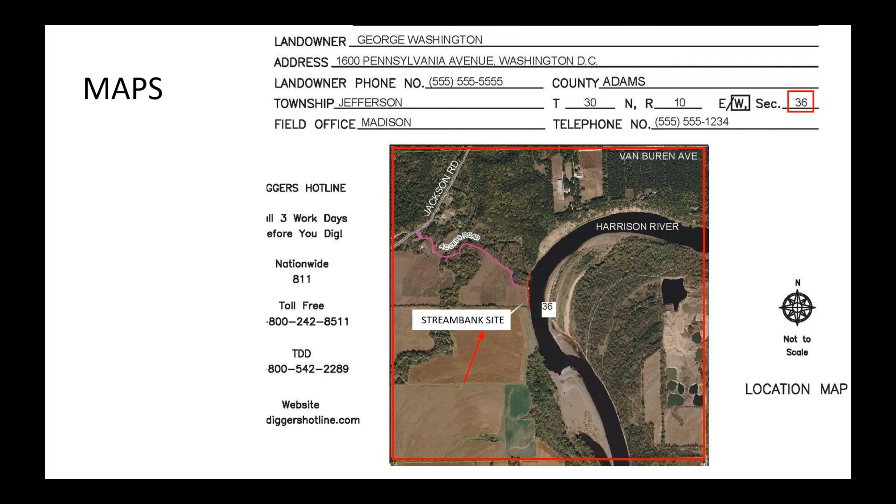The purpose of the location map is to describe where the site is located to someone who has never been there. Traditionally, the location map shows the entire section and then points out where the site is located in that section. If you want to zoom into a quarter section, which quarter section should be noted in the township, range, and section area. I'm going to try turning on our little pointer here. So up here, you could say that you're in the northwest quarter section or something like that.

Maps should be drawn with the north arrow toward the top of the sheet, but if this is not feasible, the map should be drawn with north toward the left. A north arrow must be shown on all maps. Show an egress route when the site's not close to a road, especially if it's not obvious how to get to the site. Label the roads. Ideally there is more than one road, but items like rivers, we have a river here, and railroads can also help in location too.

A quick checklist, if you're the checker of a plan for the location map, is: can the farm be located from the plans, and is the project site clearly shown?

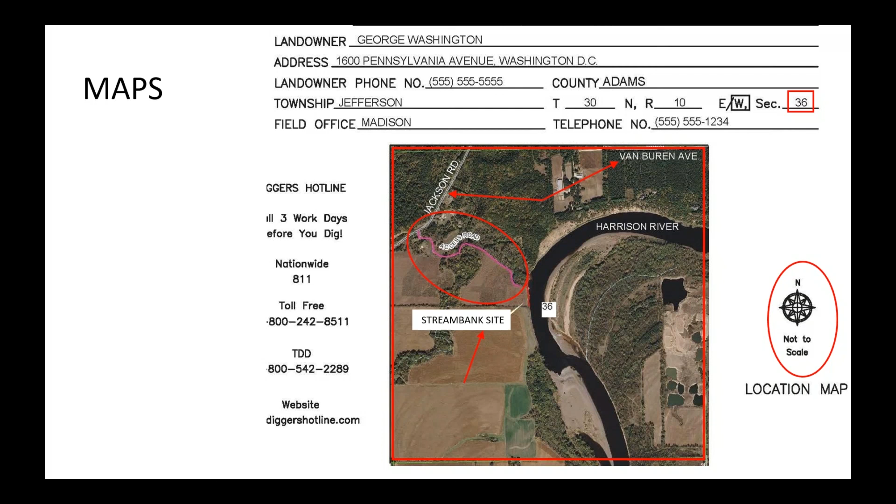Now, another thing we might have thought of as a map, but they're calling layout drawings, or sometimes they're called plan views and layout sketches. The north arrow can be in any direction on these. You want to pick a direction that allows the layout to fit on the page. Traditionally, the layout would have the direction of flow going from left to right or from top to bottom.

The north arrow would be important to show how to orient the page in the field. But if having it go left to right or north to south would make it confusing, you can have the north arrow going up, as is shown in this example. A quick checklist for a plan view includes having benchmark information, some layout dimensions, a scale, and of course your north arrow.

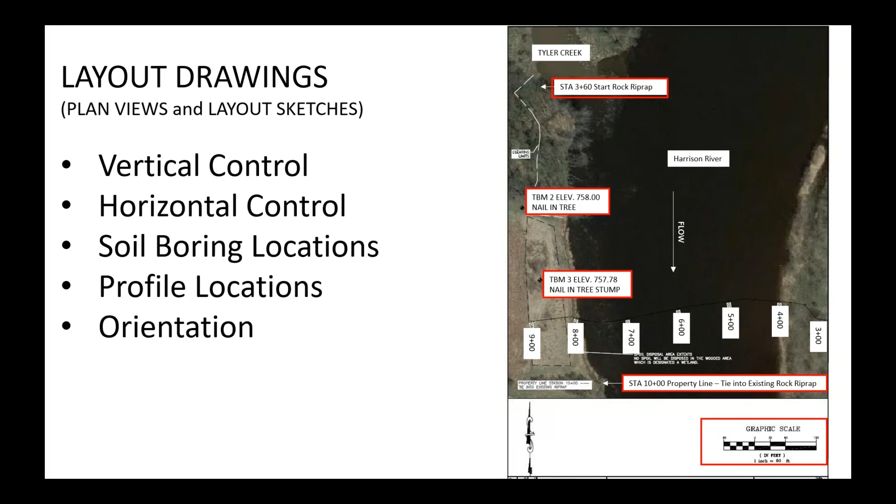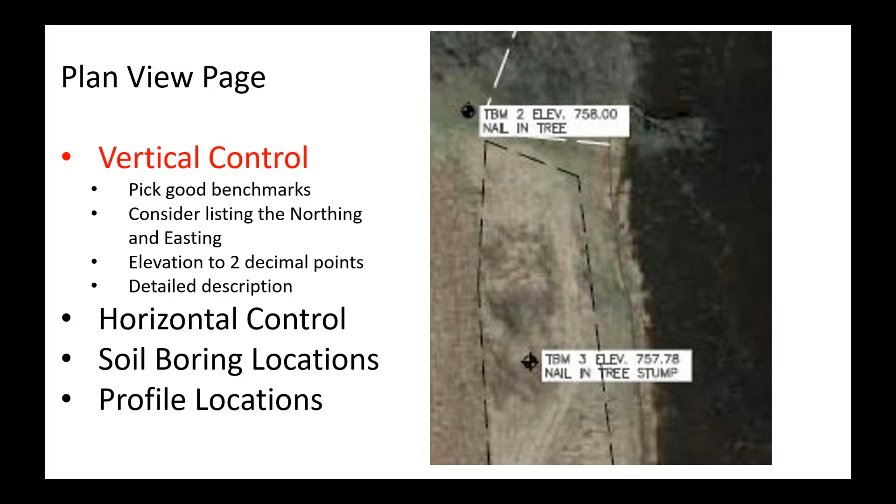Vertical control requires picking good benchmarks that will last through construction. A good description or northing and easting are needed so that the benchmark can be relocated during construction. In this particular case, these TBMs just said nail in a tree, and the construction plan actually got worked on 5 years after it was surveyed, and one tree couldn't be found anymore and the other was now a stump. So consider these things when you're doing your survey.

Horizontal control, this plan view shows some riprap stationing, clearing extents and a spoil disposal area. But is it describing horizontal control? The designer chose the downstream property line as station 10+00 because it's easy to locate that point in the field, and it ties into some existing riprap here. This is an example of some good horizontal control.

However, the spoil disposal limits, this black line here, was not well described. It's really only visual. So the question to ask is, is this acceptable? Would it have been better to give a minimum distance from the top of the stream bank that's shown, and maybe just label the left edge as the field edge? You can kind of see from the aerial photo that we have a change in vegetation, but it's left kind of nebulous there.

The upstream end gives the starting riprap point as station 3+60. This can be measured from the 10+00 station, and it also allows for extension of riprap if you need to take it a little further during construction because of things that have changed on the site. This way we wouldn't have any negative stations. If we had made this 0+00 and gone the other way, and then had to extend in this direction, we'd now have some negative stations.

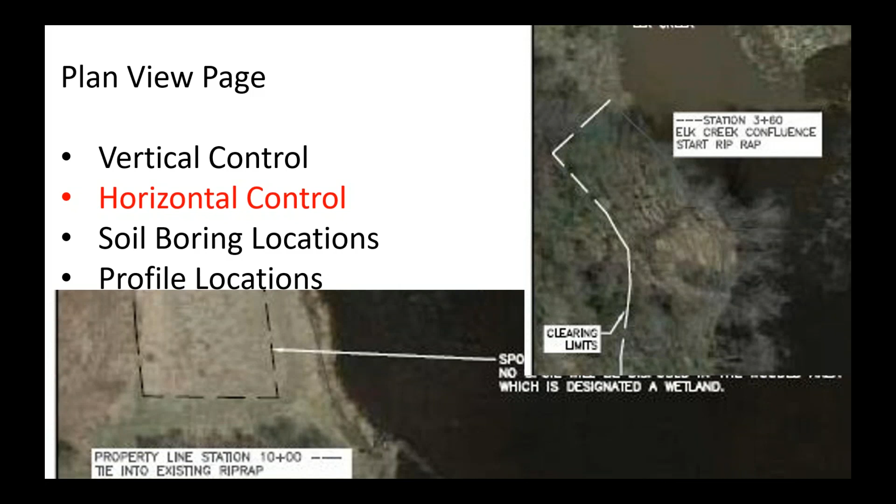A common error in the preparation of construction drawings is the omission of required details, sections and dimensions. Soil boring locations are really only needed in the construction plan if it will be useful to the contractor to construct the practice. But what's important to note is soil logging information is always required in the soil report that's kept with your planning documentation.

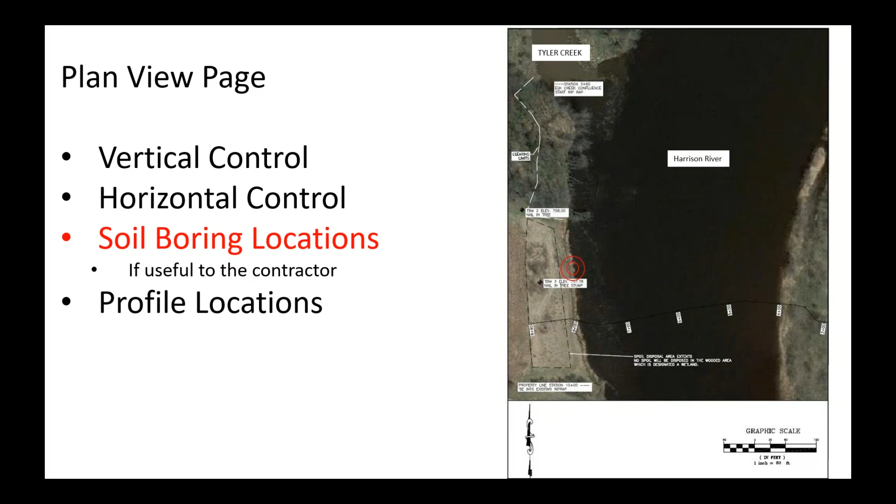When it is included in the drawings, the boring logs should be plotted on the profiles or cross sections at the locations taken. And when the test site does not appear on the profile, the location may be identified on the plan view, and then your log data can be put in another convenient spot on the drawings. The Unified Soil Classification System should be used to describe and log all soil materials, and applicable groundwater levels with the date of observation should be shown on the logs.

So profile locations, profiles and cross sections, they both kind of fall under this topic, and Pete's going to get into profiles a little more. I'm going to discuss a cross section since there's one on this plan view. Cross sections should be plotted as viewed when looking in the direction of increasing stationing of the survey, such as from station 0+00, and you're looking toward the next advancing station like 10+00.

Stationing usually increases in the direction of flow toward the downstream. So you can see the flow direction is this way on the river. And in this situation, we had 3+00 on this side and 9+00 on this side. So if we kind of turn our heads upside down and we're looking downstream, 0 would have been on our left and the higher stationing to our right.

So we often will say left to right looking downstream. But if such orientation makes the drawing unclear, it may be changed as long as the orientation is labeled, such as left to right looking upstream. So perhaps in this situation it may have made sense to have 0 on the left because of how our plan view was showing it. It depends what you're used to doing in your office. Also, sometimes rivers are already stationed from a previous job, and then you should always go with what's already being used.

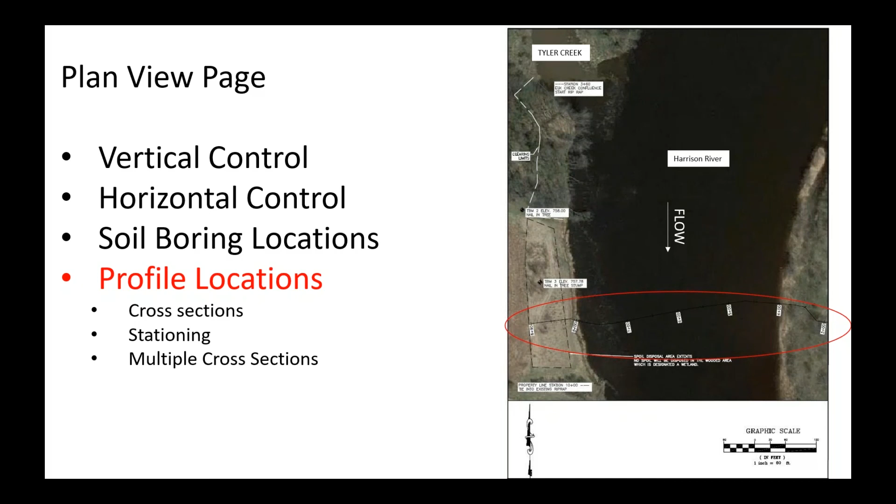In that case, your cross section on your plan view should start at the point that you're using. In this case, the plan view is only showing from 300 to 9+00, so the cross section in the plans should show that same stationing. Multiple cross sections on a sheet should be of similar scale and arranged sequentially according to stationing, and probably the main point is consistency. Orientation of views and directions of stationing must be consistent throughout the drawing set.

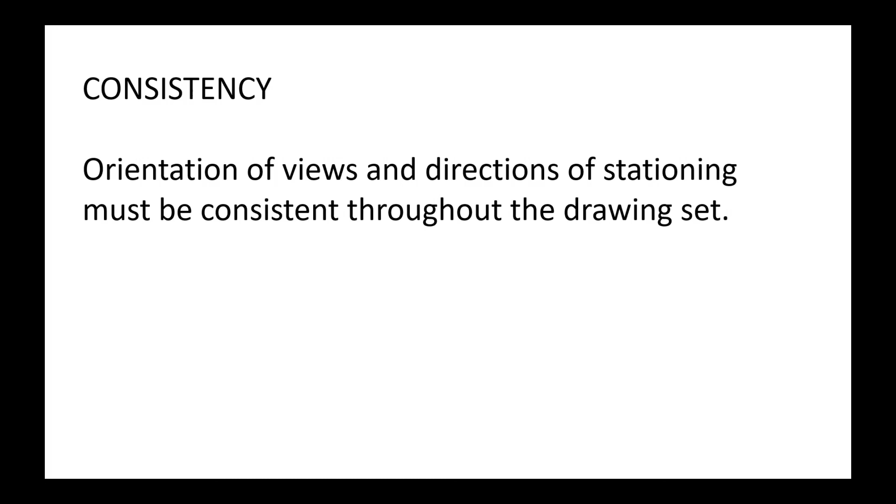All right, what I was going to talk about today was the style and content that we put in our construction plans and details. Starting out a little bit dry because we'll talk about some of the National Engineering Manual policy, but the written policy is where we keep our consistency in the things we do, and that's where a lot of the information we're after is found when you're looking at construction plans.

So starting in the NEM, it says drawings should present as much related information as reasonable on the same sheet for efficiency and clarity. If possible, details should be drawn on the same sheet as the work to which they apply, so you're not chasing through a plan for different details. If details are shown on a separate sheet, appropriate sheet references must be noted. So try to get it on the same sheet if you can, but if you can't, you can note to different sheets. Dimensions and sizes of components should be shown on the drawings rather than referenced in specifications or standards.

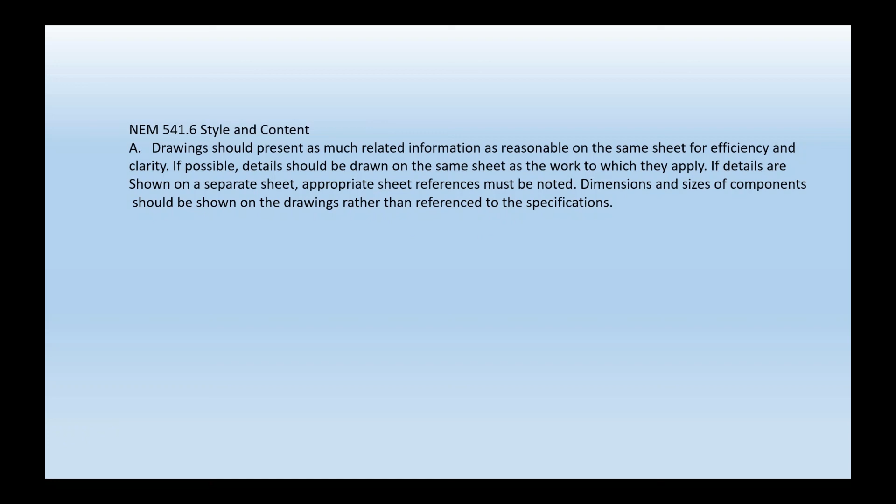Reduce the number of pages where possible. If you've been around a while, you may have seen the 25 or 30 page set of construction plans, and it's hard enough for us to deal with that, but a landowner or contractor would find it even worse. So try to keep page numbers down. But if the page size is limited, you can reference some of the details to other sheets.

Now here's an older drawing example with multiple details on one sheet. This was one of the bigger size sheets, and we tend to get away from those nowadays, because when you get out on a construction site, it might turn into a kite or something since they're so big. But they did have a good use in that you had the multiple details all shown.

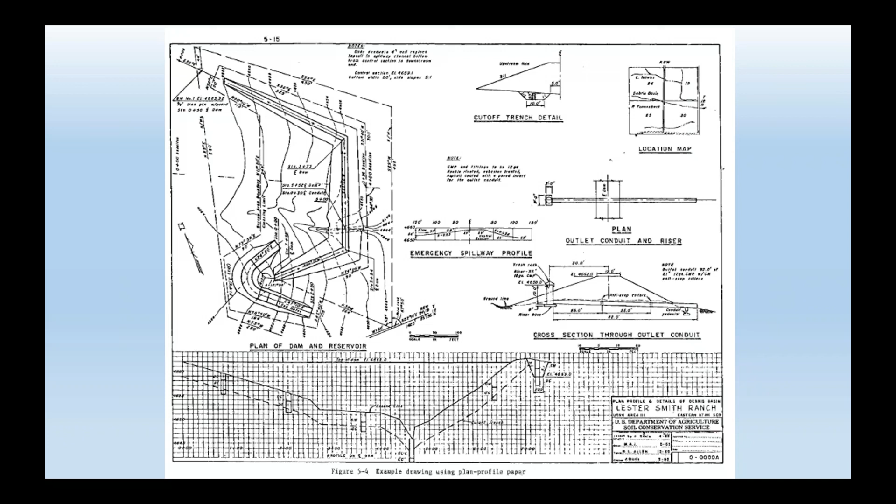Your individual printer capabilities and paper sizes are going to dictate the amount of detail you have on a sheet. Now, most of the time we go with the 11 by 17 nowadays. Here's a more basic view with notes indicating which pages the additional details are on, because you couldn't fit that many details on there. So you can see sheets 5 and 7 referenced for additional details and that type of thing.

So notice that the dimensions are shown on a drawing. What you don't want to do is have a reference, say, to a standard to get the top widths, like 'see the 378 pond standard for the required top width.' You want to have it on your plan so that all the information needed to build a project is pretty much on your plan view page, or at least you'll know where to look for it.

Here you can see the grass waterway standard drawing details are referenced by page number, such as 'see sheet C such and such' for the details. And in this case, a photo is brought in behind the survey data, and that can be a good visual aid, but it's not required. In some cases, it's not really that helpful.

You'll notice up in the upper right here that you have a road name that's a little bit hard to see because of the background information and colors behind it.

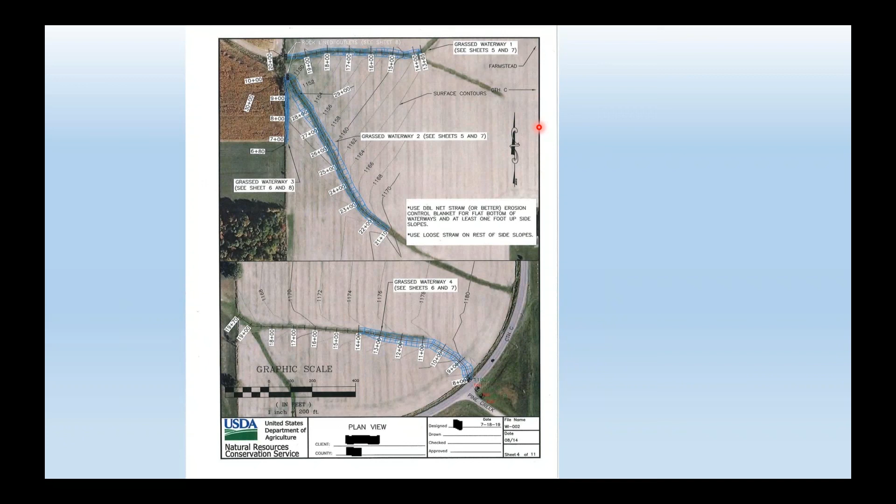So the style and content we've talked about. Content, appearance, and the details themselves are all extremely important to us. We should take pride in our work and strive for complete clarity in what we're showing. For consistency, we follow industry and agency standards so that across the state, things are pretty much the same.

Symbols used in the preparation of maps and engineering plans should be consistent with the national cartographic mapping symbols. So there are national symbols out there. Our construction plans and drawings need to have a professional appearance that we can take pride in.

Mistakes and sloppiness in our details are not often forgotten by contractors and landowners, if they ever forget. If you give them something that's of low quality and they find mistakes, they aren't going to forget that. So we strive for clarity and a professional look, and in some cases it's almost like a work of art, something that's really good looking for them.

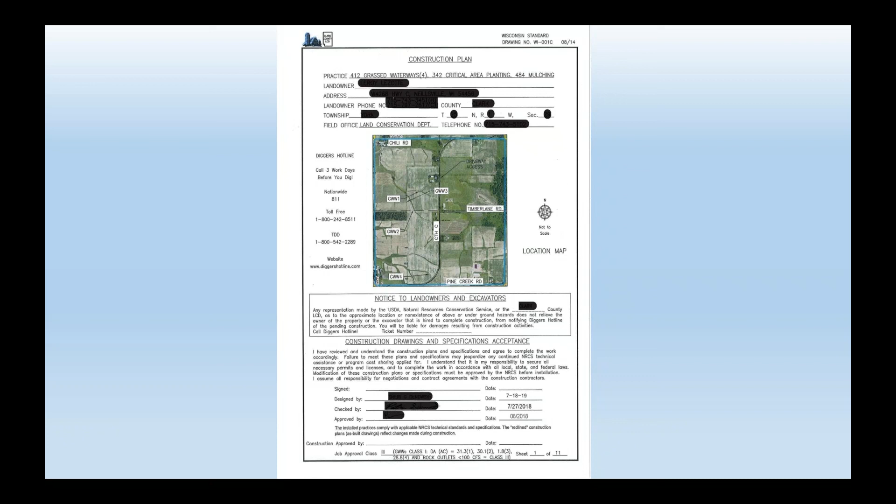So our construction plans are all fairly similar, and that's for a good reason. We're following the industry and agency standards. We all start with a cover sheet describing the geographic location of the project.

We also always include quantities and pertinent Wisconsin construction specifications. It's important to get the page numbers right. That seems to be a recurring problem.

And with today's CAD drawings, layout pages are often scavenged from other plans, which is a good time saver, to take a page from a different plan and bring it into the plan you're working on. But we have to be real careful with that and make sure we keep the exact details we want for the particular project we're working on in our plan.

I've seen cases where the estimate of quantities page came into the plan and there's a wrong pipe size, and all through the rest of the plan you had a 12-inch pipe, but on the plan estimated quantity sheet you had an 8-inch pipe size because it was brought from a different plan, and that was very difficult for the contractor. So we take pride in accuracy in a set of plans that is easy to read.

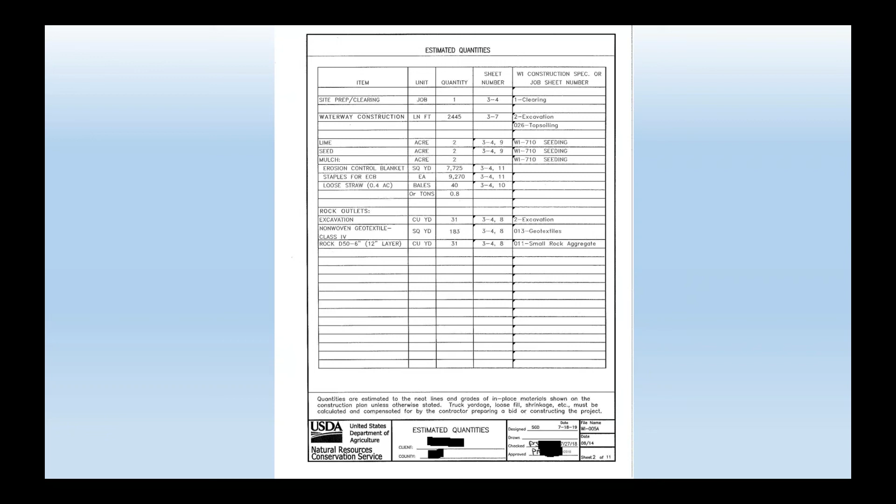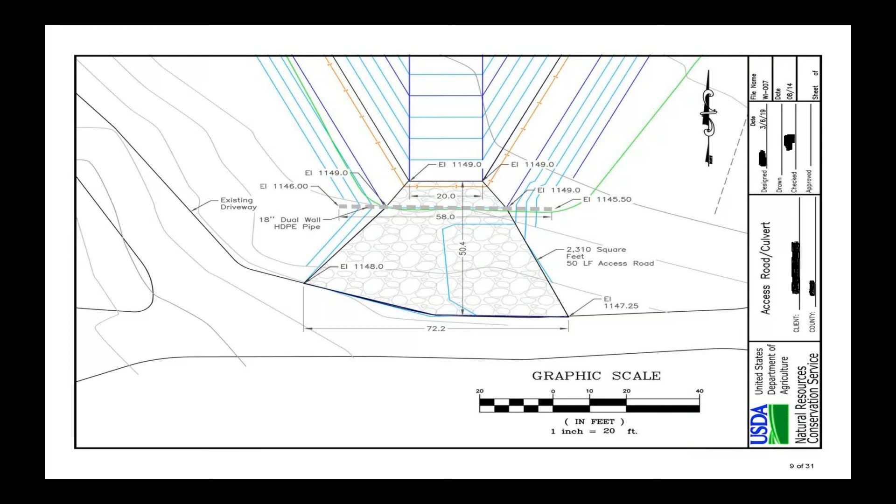We're often going to show details that we create in the plans, various views of the project components. You might say, well, which details should I show? And this is a big one here.

Our construction plan content is shown at the back of the design standards that we're using. There's a list of plans and plan requirements at the back of the standards. It's really critical that we look at that and include everything that's in there. That's going to keep us consistent, and that's the requirement.

I mean, you have to meet the design standards. And don't think that your quality assurance engineering spot checker won't be looking at that list when it comes time for the engineering spot check.

Keep in mind that the list is our minimums too, though. You may have to add additional details.

Our goal is to show the views of the details of the various conservation practice components required for easy comprehension of the project by landowners and contractors. We often assume that landowners and contractors understand our plans, but all too often they do not, due to poor plan compilation and explanations by us.

In some cases, landowners are actually very surprised by the end result of our practice applications, which is really unacceptable to us. I've put in barnyard projects, and the landowner said he really liked the project and the end result, but he said he was surprised at how it looked, and I couldn't quite understand how that was.

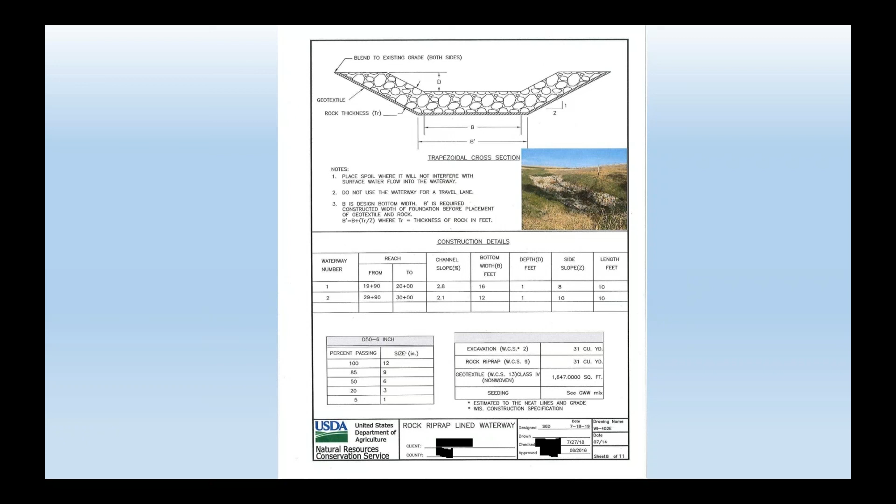We often include standard detailed drawings taken from the Wisconsin NRCS website. Standard detailed drawings are very helpful and make our lives easier, a lot easier, actually. If you're planning to modify or customize a standard detail drawing, you'll need to take the standard drawing number off the page or else relabel it as modified.

It is highly recommended that you make the changes obvious. So here you can see where it says modified, and the changes are up here. You want to somehow make it obvious with your text or text color so that the checker can see what you've changed, so that they don't have to guess at how the drawing has been modified.

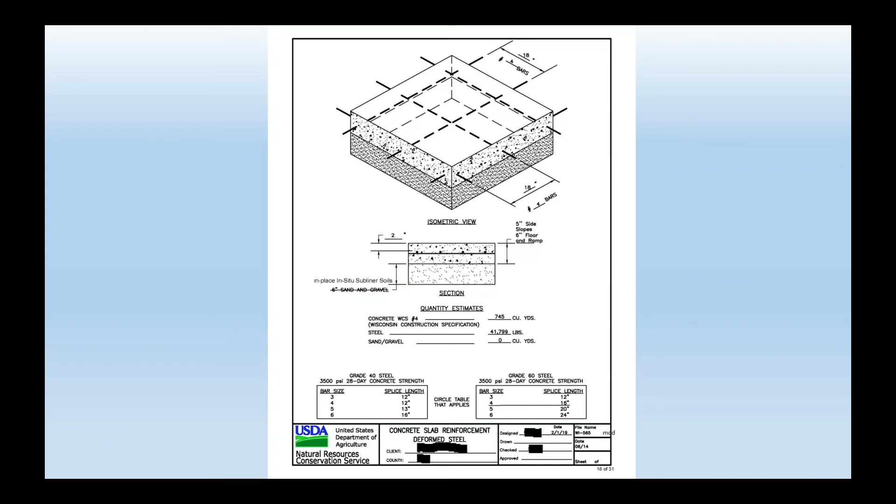Structural component changes need to be approved by someone with proper engineering job approval authority. So be careful when you're changing a drawing. It's your responsibility as design approvers to ensure that the details result in a practice that meets the design standard requirements from the field office technical guide. You're ultimately responsible that the design meets the standards, so you shouldn't be willy-nilly changing the standard drawings if there's any question.

The symbols we use on plan views should be uniform from project to project. Because of this, there are helpful standard drawings with symbols that we can use that are up on the website. These drawings can be used, or the same symbols can be shown on a page view or layout sketch in a legend. It might be preferable to have it in a legend so you don't have additional pages in your plan. The legend and symbols help reduce the need for leader lines and notes, which could clutter up your views.

Symbols used in the preparation of maps and engineering plans should be consistent with the national cartographic mapping symbols, and the ones on these drawings are.

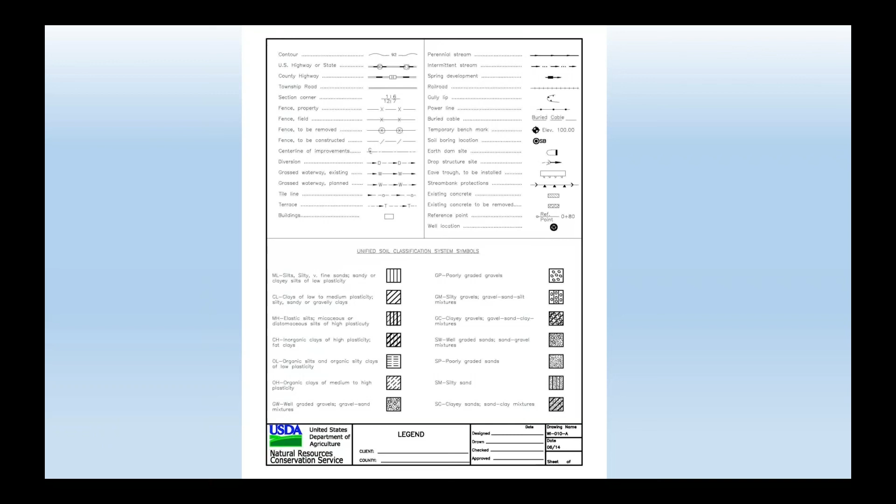Scales for drawings should be selected carefully to assure clarity of details and accommodate reduced size reproductions. Bar scales are preferred for maps and plan views and are necessary for any drawings that will be reduced for contracting.

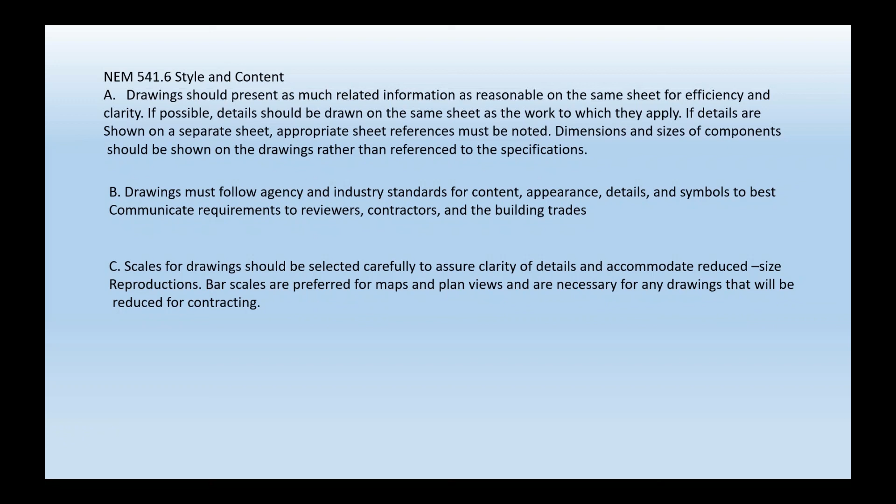The scales used are always important. Can an old person like myself read the dimensions and letters in the field without a magnifying glass? Can you tell what the details represent? Will reproductions result in readable plans? These are all things you should be thinking about.

Archived EFH Chapter 5 indicates the standard scales we can use for topographic details. Easy scales for field use include 1 inch equals 20, 40, 50, 100, or 200 feet. EFH Chapter 5 information is older and relates to the standard drawing sheets we used in the past for design, but they are still relevant today for clear and easy to read plan views and profiles.

Keep in mind the field work and units on your engineering scale or ruler that you will be using in the field for layout. Using a scale that would require conversion of the units on your measuring tool in the field is not a good idea.

I think I've seen scales used where the units on the scale you'd measure with in the field were like 1 unit equals 2.5 feet, and that made things difficult. So try to keep things as simple as you can. Your goal is a clear and easy to read depiction of the project that is simple to use and an accurate tool for project layout.

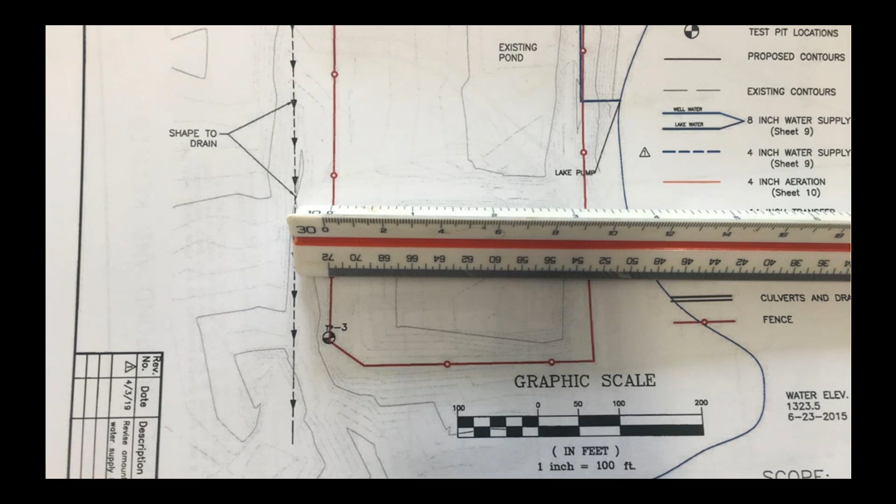Note the bar scale that keeps accuracy when reproductions are made of this layout sketch right there. Keep the text size clear and readable. Our goal is complete clarity of the details, making them easy to see, read, and lay out in the field.

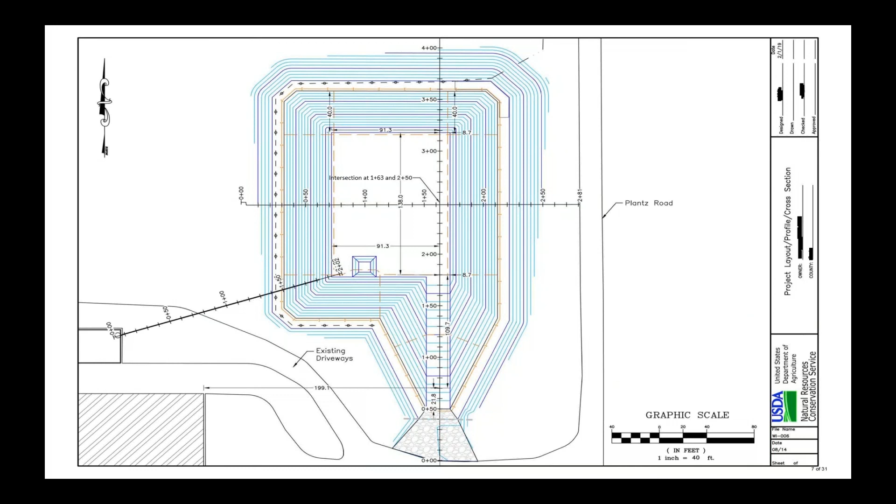Note the fixed known points with stations at the roads, building, and reception tank. What you don't want to do is send a plan out with a wonderful detail you've created and then not have any fixed dimensioning on it, like making the person use an engineering scale to measure to the practice. You want to have things laid out with dimensioning, or cross sections or profile stationing, so that it can be located from either fixed points, or in some cases GPS units with northing and easting to locate corners and things like that. But we need to be able to locate these things. That should be one of the priority things you're thinking about when designing and putting your plan views together.

Avoid different text sizes. Consult with a CAD specialist to make this process more simple. You can see some of these are bigger, some are smaller. Try to keep that consistent.

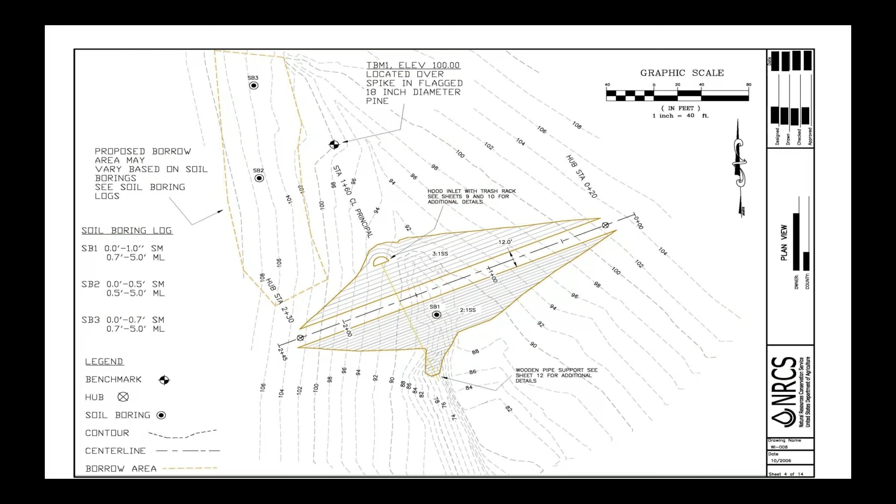Profile scales need to be reasonable and readable. Using AutoCAD, most profiles turn out well as long as we pick good vertical and horizontal scales that fit on the paper. Notes are usually included on the profiles to clarify things.

Avoid extremely long profiles on a single page, which causes the actual details to be minute. You can include distortion in the profile, and should, if a 1-to-1 scale is too long or too high to fit well in your drawing environment.

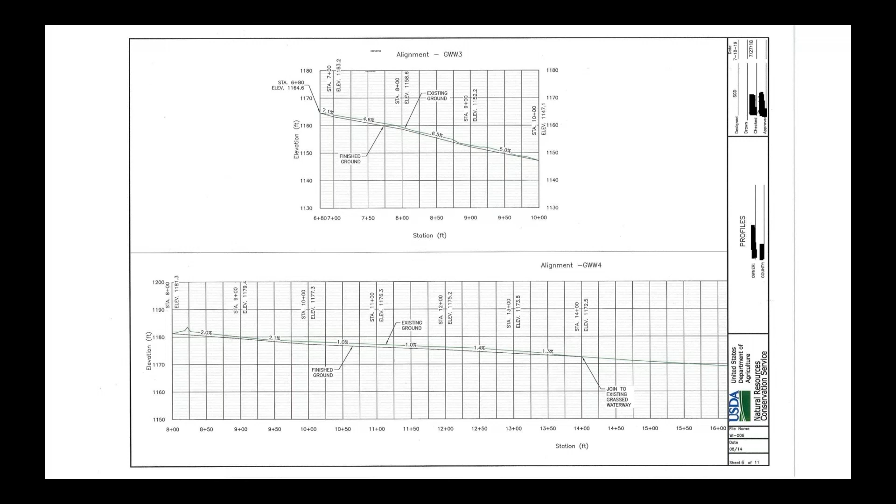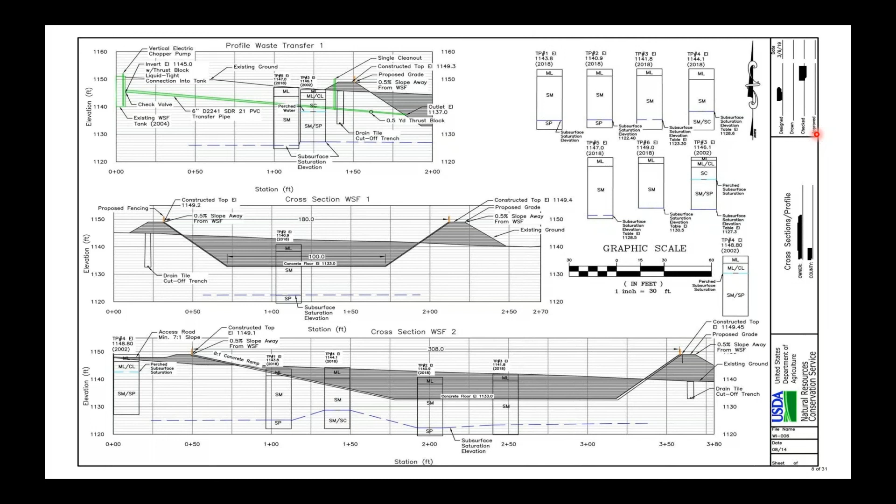Note that there could be improvement with the text size consistency. The scales can vary between profiles from plan to plan, but try to keep the scales similar within your plan on your cross sections, if you have several of those, and on your profiles, because a person can think they're using a certain scale based on one profile, go to the very next one in your plan, and if it's a different scale, it can be confusing.

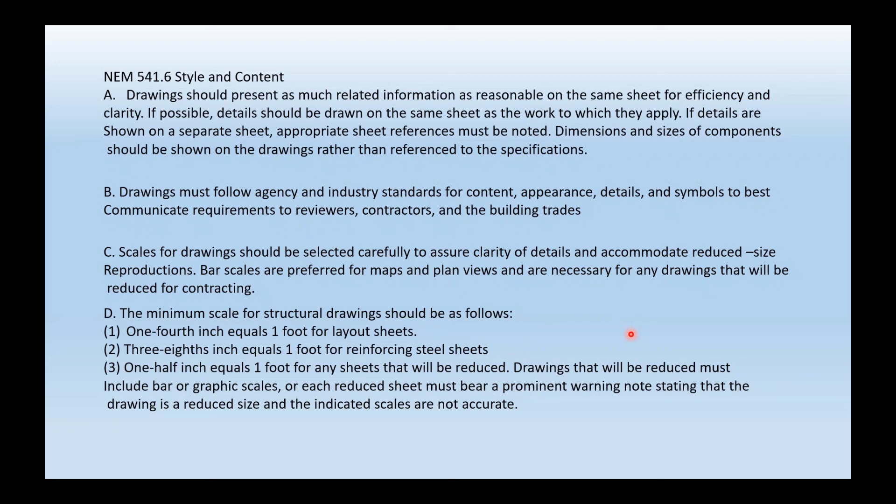Note that there could be improvement with text size consistency on this view. Structural drawings like standard reinforced concrete wall drawings use an architectural scale of feet and inches. All other scales are feet and tenths. So your standard drawings are a little different.

Now about the notes: notes should be precise and to the point, without a lot of repeated notes cluttering up the drawings. You don't have to keep repeating things. In fact, too many notes will reduce the impact of each individual note. They'll get lost in that huge amount of notes in the plan and won't be zeroing in on things. The specifications can be referenced or items emphasized by taking the words right out of the specifications, for emphasis.

Don't keep repeating the specs in the plan, but keep things clear and uncluttered. Avoid writing the specifications word for word on your construction plans, but you can mention critical items for reinforcement. And make sure the text line weight is readable and can be reproduced easily.

So actually, that's all I had.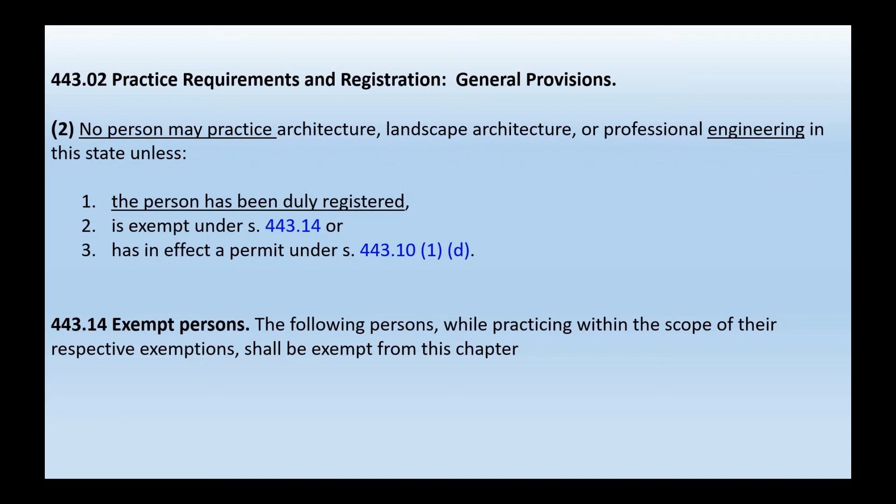It goes on in the law that you can't practice, as I just said, unless there's a number of things - there are a bunch of exemptions. First one, you're registered. Second of all, exempt under 443.14 or 443.10(1)(d). And with those exemptions, if you're working under them, you are okay because you're exempt from being licensed as a professional engineer. And those exemptions are what you see here.

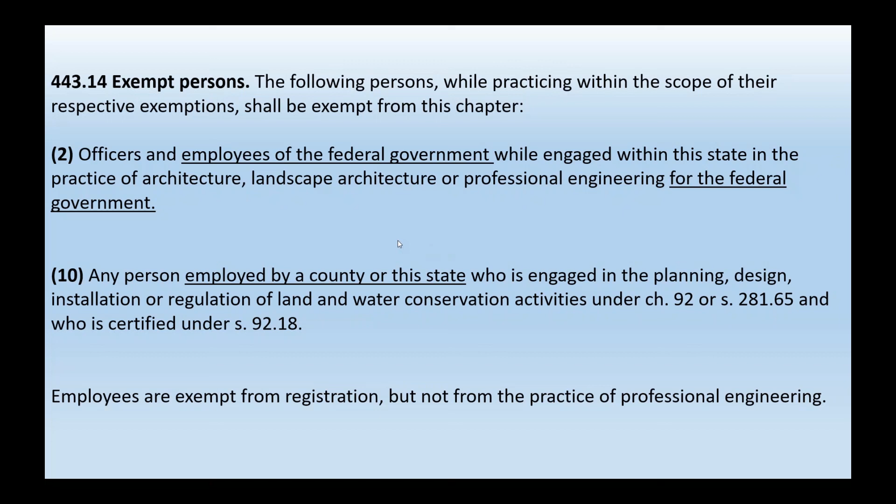It's for federal employees working for the federal government, and it's also what most of us know as the certification program through the Department of Ag. It exempts us from being registered as professional engineers. It doesn't exempt us from using good practice of professional engineering. We do this through NRCS, at least through our National Engineering Manual, and we'll get into that a little bit.

A broad topic here, which was going to cover Mary and Pete's part, is a philosophy of the practice of engineering, that we want to put enough design documentation together in all of our efforts that we tell the story of that design process and it's clearly presented to others.

We do a decent job putting design documentation together, but what we sometimes don't do is connecting the dots of all the pieces. A reviewer and approver, at times when you're looking at it, have to make some assumptions or interpretations of reports, where as a designer, you want to lead them to make the connections and not make the reviewers and approvers reconstruct things you've done on scratch paper, side notes, in your head, on your computer. It needs to be part of that record.

And that's the design process. The construction plans and specs, which Mary and Pete covered, are conveying that to the builder of the project. The operation and maintenance things are for the landowners to operate that system. And with the other document we present, the inspection plan, the quality assurance plan, is the designer communicating to the person who's going to be the boots on the ground on what types of information they need back to make sure this was done correctly.

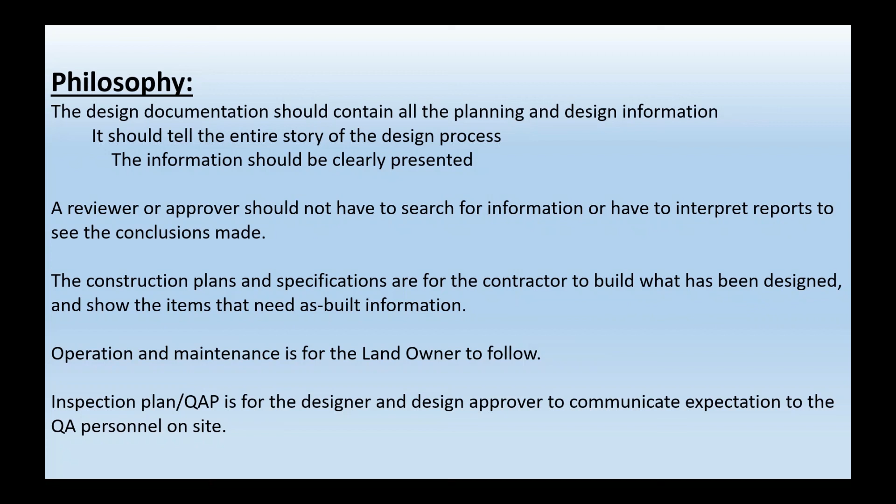As I mentioned, we have the job approval system, which helps us be exempt from the state law. In the National Engineering Manual, that is spelled out in Part 501. We have other sections we follow, 510, 511, 512. And you heard a little bit of the 541, the drafting and drawing piece as well.

So one of the things we want to do is, how do we pull all this information together? We should have a good design folder, and it's going to be appropriate to the job. Having a grass waterway or a simple diversion is not the same design folder as a complex ag waste system, a complex irrigation system. So all of these pieces may or may not be there depending on your job, and they may be just a sentence or two or a few notes on your computation paper compared to a long 3-ring binder report. So remember, it's got some scalability.

So the first box there is the design process: working through trip notes, survey notes, soil investigations, all of that upfront information. The next bullets are more design related, and on the right side, more design related information. The bottom part, the reason for the line is, now we've transitioned from design documentation to construction drawings and material for others.

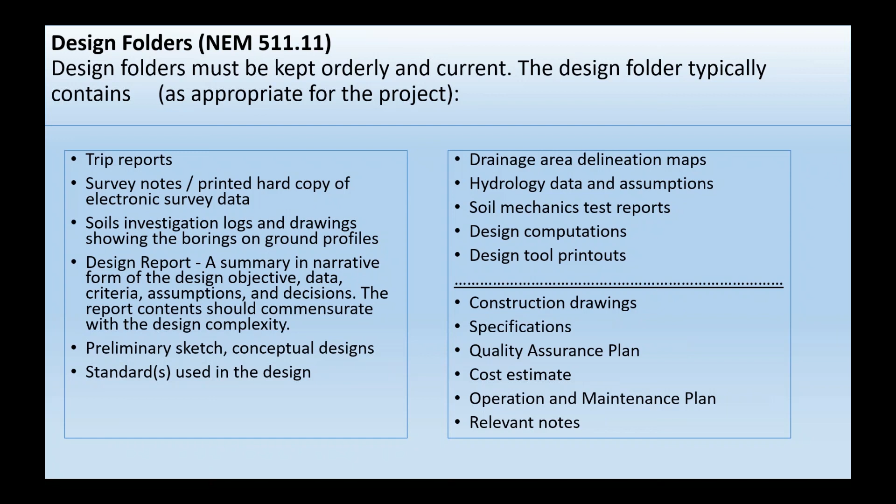We often think, oh, we just need to improve the construction plans. Well, it's the whole package, and they are distinct, different documents, and we need to consciously remember that. Okay, so I'm going to step through planning, design, and construction briefly out of the NEM.

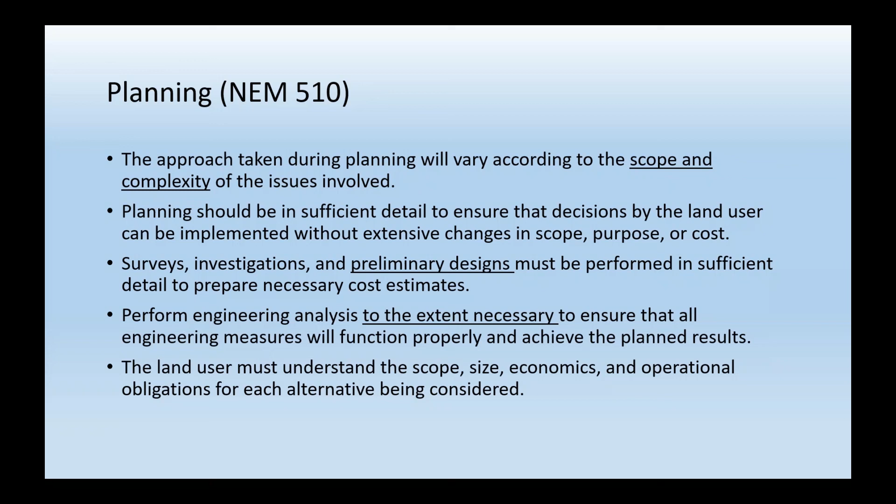The scope and complexity is going to vary, but we want to do the early planning things. We've talked about conceptual plans and preliminary soil investigations. We want to do those so we don't have to duplicate it later. You can see some notes pulled right out of the NEM on how to do it, or the guidance to do that, and why we do those things. Remember, scalability from small to large here.

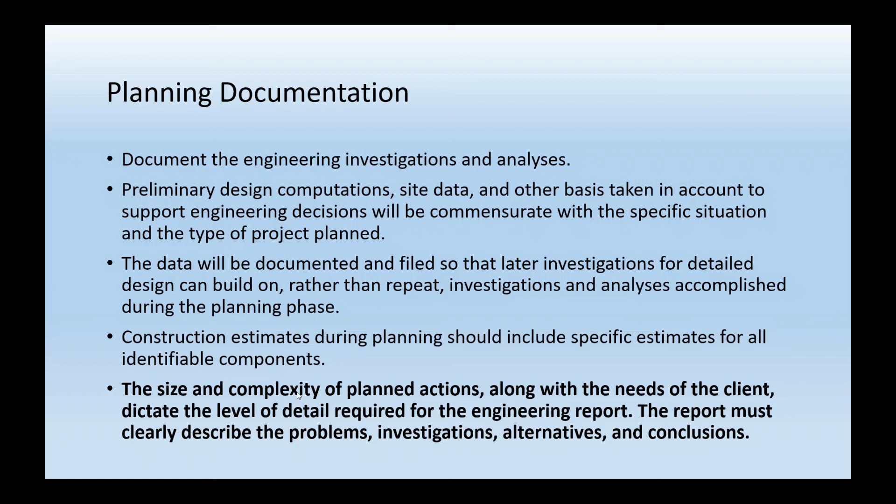A little bit more on the planning. We do them, but it's putting them together in small, simple packages. So if somebody said, oh, I'd like your soil report, you have all the soils information together in a packet. I'd like the design documentation when we get to that point, or some of your trip notes. Nice small packages that you build along the way as we build our more complex projects. Again, size and complexity and level of detail depends on what we're building.

Okay, design. Once we have all our planning done, and the reason it says final design is there are different stages of design too, preliminary and intermediate stage. For those familiar with the private world, you know, they talk about 20% packages, 50% packages. This is the 90 or 100% package with final design. We want to, in that final design, go back one last time and make sure that everything leading up to this point documents and carries through to our final design. There are times when that doesn't happen, so we need to go back and check the entire design folder when you are the approver of the design itself.

Make revisions of preliminary stuff that we need to along the way. Double check the hydrology, double check the structural comps, and start preparing the things moving out for the contractor.

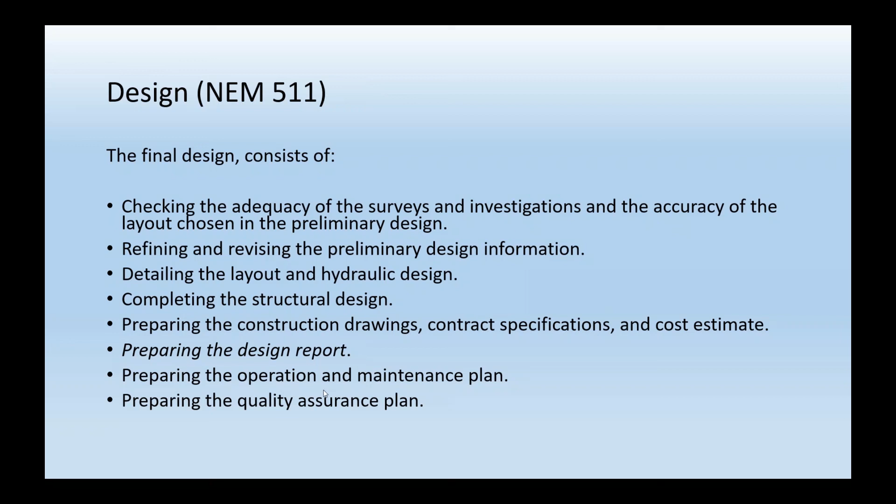When you finish your design, that's the time to go and write your design report. It's a summary. Think of the executive summary of a document. Give me those 4 or 5 pages to give me the cliff notes of what I'm going to be looking at as the reviewer and final approver, with details to follow. Completing the O&M and the quality assurance plan as the last pieces of the design process.

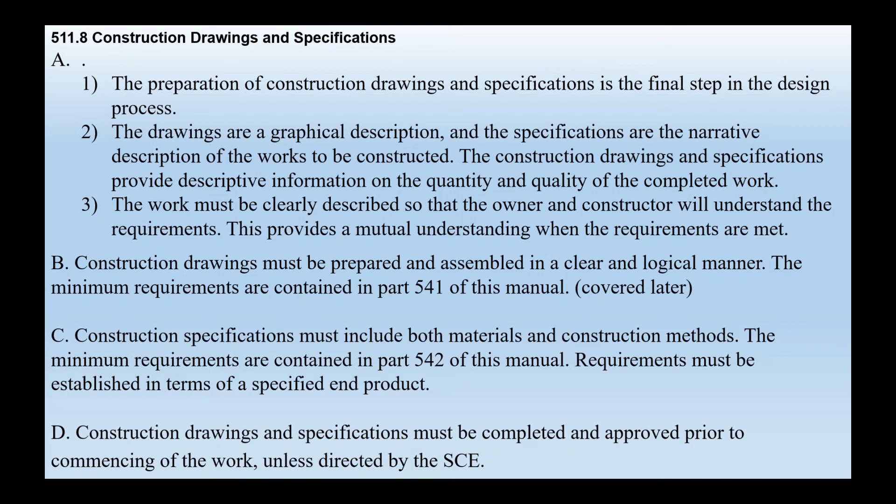Again, it's the final step. It's the graphical representation of the construction plans. The specs are the narrative. They need to connect. They need to provide enough detail to get a quality product built, and it clearly states the requirements. All of this information needs to be in the construction plans. It can't be on our computers, on our data collectors, in our heads. It needs to be communicated on those construction plans.

So this was the part of drawings. This is the general information, and Mary and Pete followed up with more specifics, but this is the general stuff that was leading into their presentations. Again, communication. It is all about communicating it to the right audiences.

Pete did a wonderful job of summarizing this. Limited notes, limited to those for accuracy. Too many notes, repeating the entire specs in the notes, then why do we have specifications? We need our contractors to know our specs as well. Calling out a few details to reinforce it is good, but if we put it all there, as Pete said, it just takes away from the few notes that we do need.

Drawings including soils information. Is that information going to be important for the contractor actually building the project? If they are just excavating a hole down to some subgrade elevation and then building upon it, they don't necessarily need to have the soils information if it's not making the construction difficult for them, because all they're doing is the excavating. The showing of subliners and liners and those things are for our purposes, and those need to be on the design side and not necessarily on the construction drawing side. So keep that in mind as putting things together.

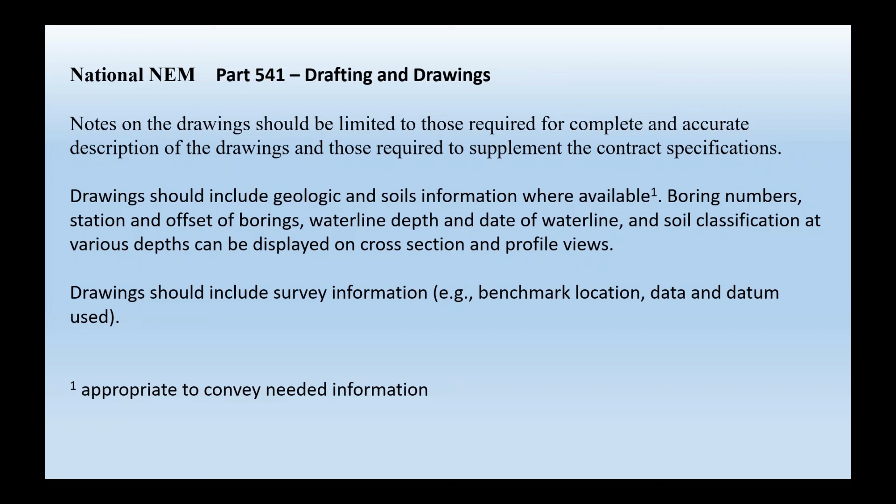Okay, if we pull up our NEM policy, what I was just going through is the national policy. JR, when he was putting together the supplements for Wisconsin, included these items for construction drawings in our Wisconsin supplement. And it's a lot of what Mary and Pete talked about along the way.

Note the 1st, 2nd, 3rd, 4th, 5th bullet, what we were just talking about. Our contractors are getting more sophisticated. They have different capabilities, so we can do the GPS layout, but we just need to have it on the drawings compared to 500 feet from this stake and 200 feet from that corner of a building. We just need to be able to get it literally from the construction plan onto the ground, however that is going to be, because if it moved, we want to be able to redline the locations, not graphically, but also how it was laid out as well.

Next bullet down, checkers and reviewers. There is policy that all of those pages are checked, that you as a checker, reviewer, approver are touching those pages, not just to touch them, but to make sure that they are of high quality and represent our agencies that we work for as well.

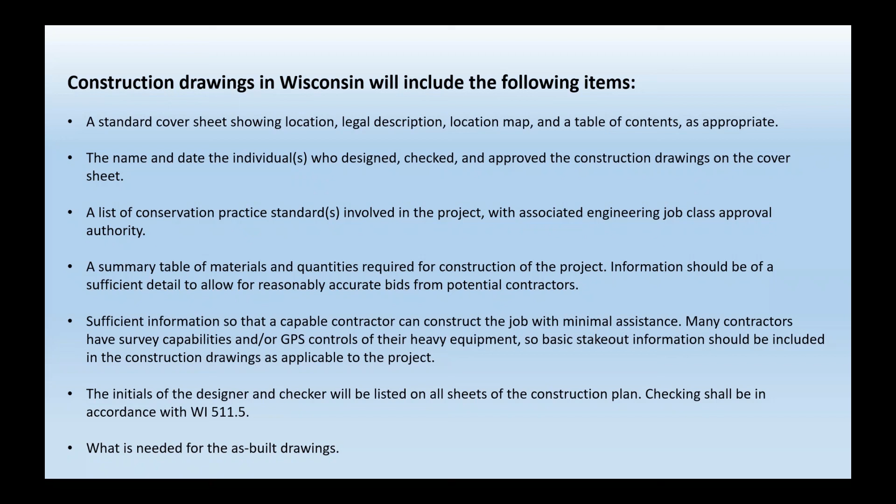So think about as you're putting that together and what you put in there for detail. Sometimes we have the exact detail of what we want out of CAD, but we also put in the standard generic cross sections and things. Do we need both? I would argue not necessarily, not all the time.

So be conscious of what you want as built and when you're done as you are putting together your construction plans. Checking of construction plans and all of that, you don't necessarily have to have job approval to do these. You just need to be experienced, have a good understanding of the concepts and the procedures that are going to be used. It's a very good way of gaining job approval for systems. And it is not just initialing each page because we have to. We really want you to go through and double check. I know I don't catch my own mistakes as I'm writing things or designing things. Having another pair of eyes is very helpful to do that.

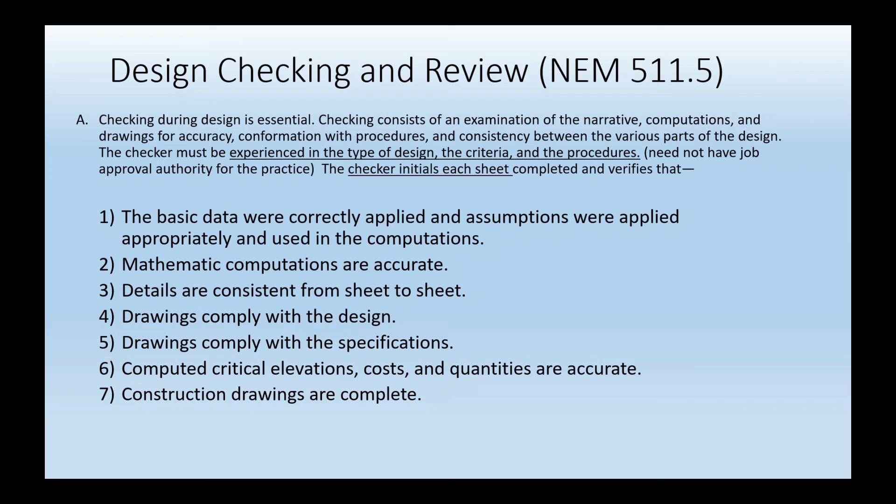So all of the math, the consistency from sheets to sheets, as Pete was mentioning, does it translate from the design into the drawings? Are we saying the same thing? There is policy in Wisconsin about which levels of jobs and what level of checking needs to be done.

If we have class 1 or 2 jobs, not as critical, that aren't ag waste management, it's possible to check your own work. I wouldn't do it the same day I'm designing it or hours after I'm designing it. And you need to remember to not just check the box, but also go, okay, step back and really look at it with a fresh pair of eyes.

When we get up to the higher level practices and all the waste management practices, we want a separate pair of eyes to make sure that when we're dealing with the health and safety and welfare of the public, that we're doing a little better job with our checking and reviewing. So the checker is going to be somebody different, and those 3 bullet points there are talking about the final approver on who or how that is done.

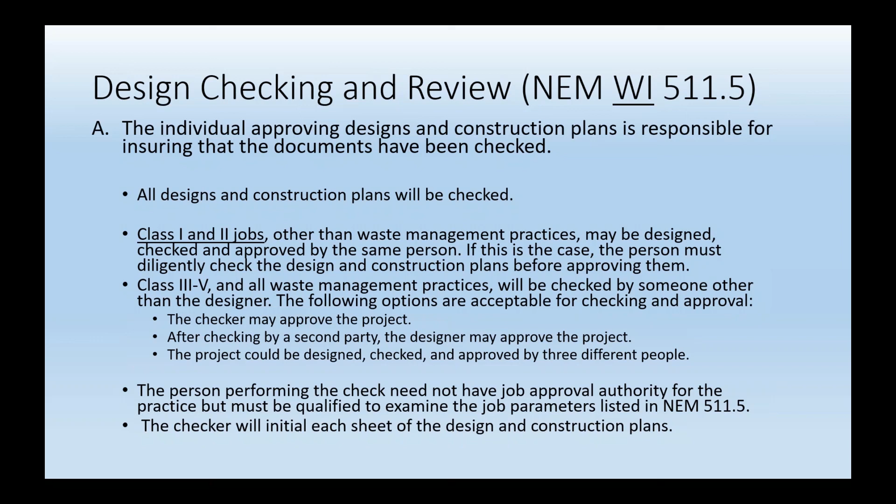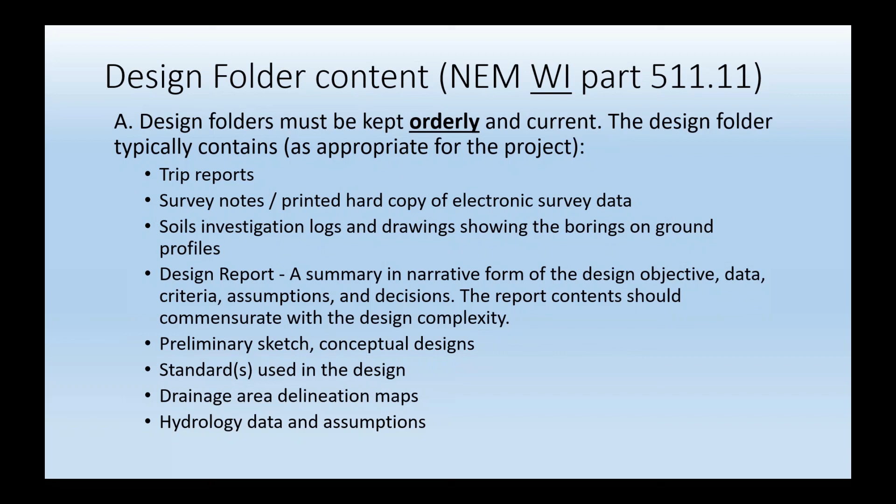Continuing on with that list, same thing as I had before with the space in here with construction drawings, starting the construction process, plan prep compared to the design piece of it. One note I'd add here, with design tool printouts and things like that, where we're generating them with other means. Back when I was a pup, we did it all by, maybe not all by hand, but close. And we wrote things out, and we stated our references we use. Oh, we pulled this out of EFH table or chapter 7, table 8. And here are the results of that table.

Well, when we can just print that and attach it as the next document in our page, in our design folder, that's helpful and good. And I have all of these lined up behind it. But it's helpful to have that summary of stepping through that, page 2 is the printout of the allowable velocities or the size of the manure storage. And that there is the final check.

You have if you think of a legal document, whereas this, whereas that, and therefore, having that therefore statement of the design volume is this, and we're exceeding it with our constructed volume of this amount, to be very specific with that to help your reviewers and approvers go, yep, got it. They can almost put a check mark next to it of, yep, that makes sense, and move down the page. So that'll help us get better design folders and design computations that lead to our construction plans.

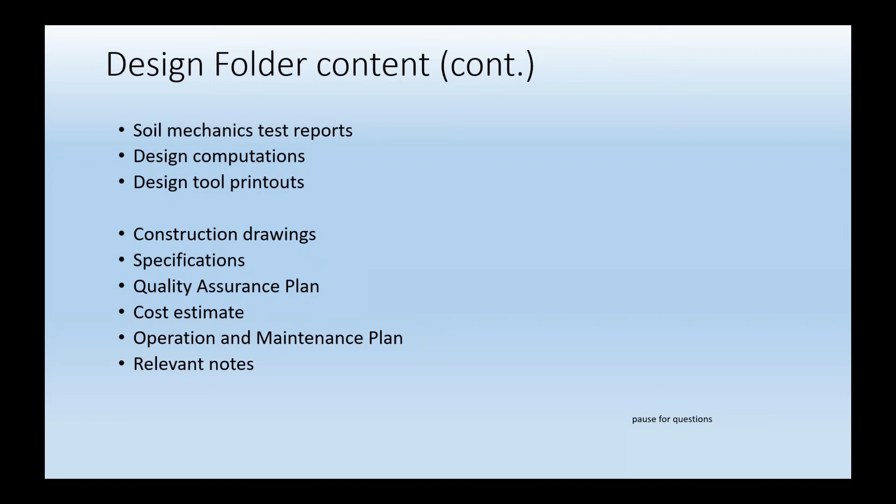So, you want me to do it again, or? I think it'd be a good idea, Pete. No, you guys did a wonderful job.

I add this slide here because, as Pete mentioned, in the standards there is a spot for plans and specs and operation and maintenance. And as Pete said, those types of things should be in our construction plan. Our national office is modifying and changing the conservation practice standard document template, and this is what's supposed to be in those sections. It hasn't changed a whole lot.

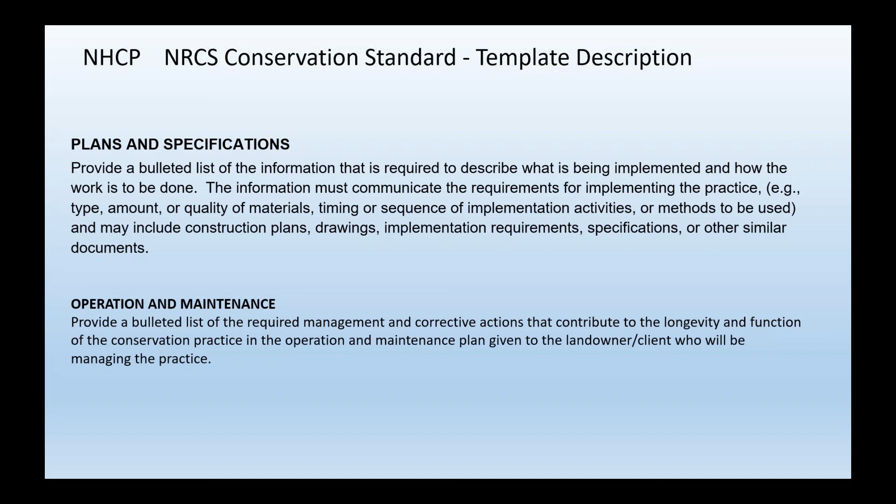But the part that's not written here is that a state will now have the option to modify this compared to what we had. I think as a state we need to take advantage of that opportunity, because sometimes there's a big long bulleted list, and you look at the typical projects in our state and you go, why would we want to add that here, given the rationale we'd use? So we'll have the ability to do that now, compared to what we had in the past when we adopted our Wisconsin standard. Just a heads up for the future.

Okay, we got our construction plans done and ready to go to the landowner. Landowner signatures are part of our 501 policy - we want to see that the landowner is accepting that construction plan. There's an acceptance statement on one of our standard drawings, and I'll get to what that statement is in a little bit.

It follows two slides back here, but you can see it on a standard drawing, our Wisconsin 001C. Everybody wanted to have it back there instead of having this separate landowner statement job sheet, which opened up our cover pages of our drawings, but it also put this in another document which needed to be tracked. And how do you connect them?

Yes, there's good and bad both ways, but that statement looks like this: they've looked at it, they agree with it, they want to follow it, because if they don't it may jeopardize technical assistance or financial assistance. They're to get the permits, and when I modify this with my contractor, I need to make sure the designers are aware of that and approve of it before we go. And they're also going to hire the contractor.

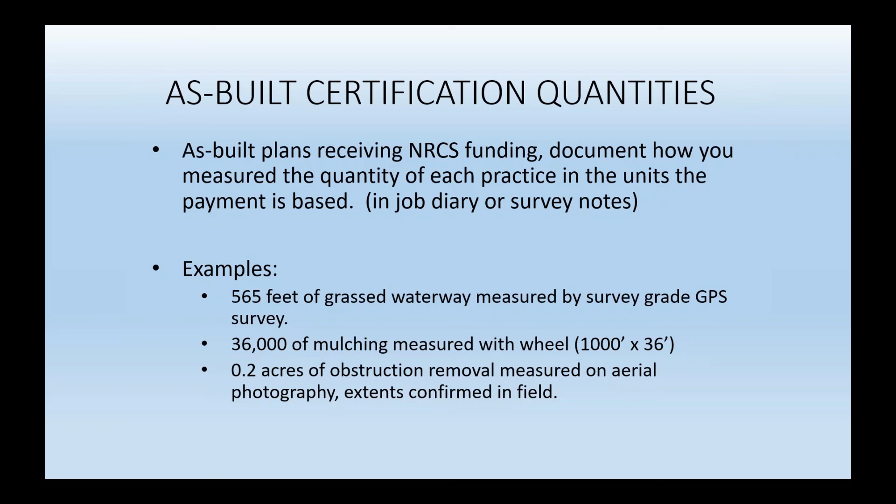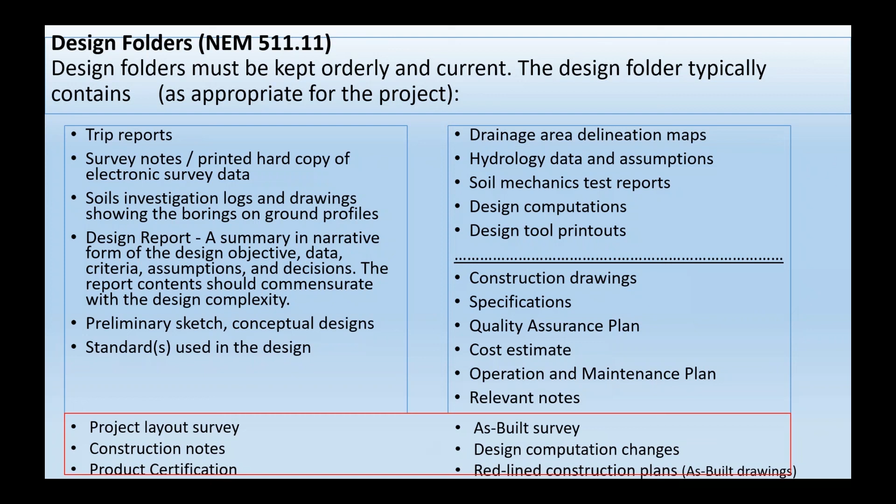So we have a document in NRCS called Technical Release number 62, and it's our surveying information. I know a lot of people have not seen this, but we've heard about it and people talk to us. But the difference - accuracy is important. How accurate do you need to be with a dimension or an elevation or a coordinate as you are presenting it to someone else? Because it means different things to different people.

If I have a number that is 0.05, I want to make sure I have a 0 out in front of that - 0.05. It just makes it easier to read for others, and it also needs to show the level of significant digits that you are looking for.

Typically, our earthwork is going to be to the nearest 1/10 of a foot, because you're not going to use construction equipment to get it any closer than that. But if you have 0.7, you'd want to see it near 0.7. You don't want it 0.9, because you're looking for that amount of accuracy. If you have things stated to the 100th of a foot, that's the expectation you are sending forward when presenting that. For most of our stuff, nearest 1/10 of a foot is close enough and functions just fine.

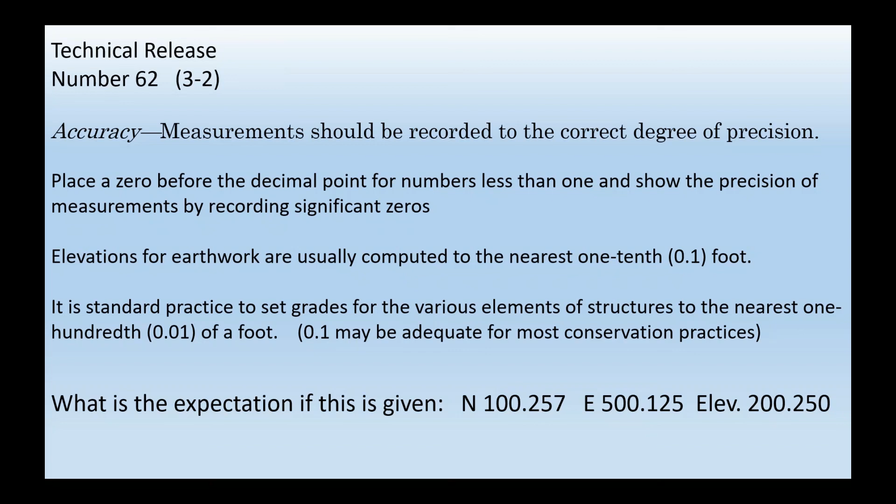Yes, you could go in and edit the table to make that as you spit it out of CAD, but that takes a lot of work and extra effort. We just need a note on the bottom saying northing and eastings to the nearest 1/2 foot, elevations to the nearest 1/10. That would be perfectly acceptable to relay the expectation you have in your construction plan.

I mentioned early on that I planned on wrapping up with having the right document for the right audience. When I was putting this together, I thought about having a quiz at the end and having people chime in to put documents in the right categories, and I decided against that. But think about the documents we talked about and are creating through this presentation, then think about the audiences on the right side, and think about where they mesh. There's some overlap, but there are certain documents that definitely are for a particular audience. Think about that audience as you're developing and putting that document together, because it's going to help you limit and make that document clearly communicate the information you wanted to communicate.

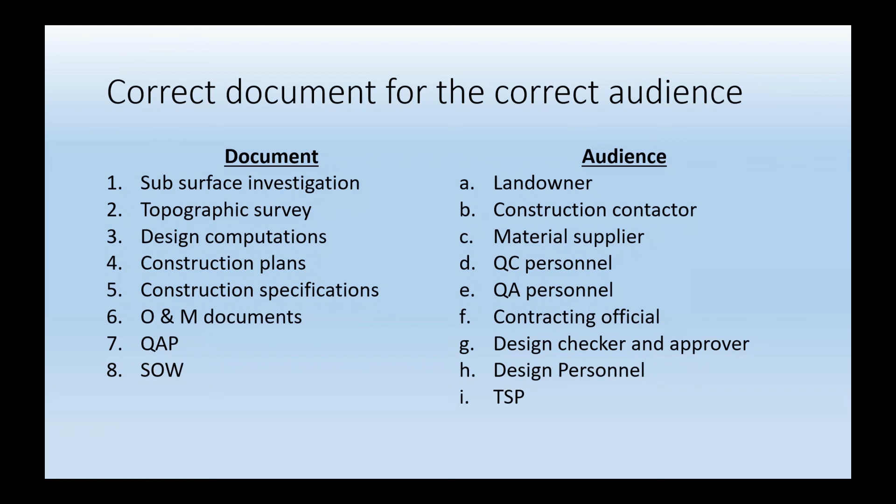So any questions as we wrap up for the day? Bernie has one. Are there available checklists for the checkers?

We don't have those. I know people have them out there and use them for their projects. The problem with checklists is that the expectation you're putting out when you have a checklist is that those are the only things to check. What happens if there's one more item, or it's not important to this job? I understand why they're helpful, but on the other hand, we want our designers thinking through what needs to be there and our checkers verifying that that's what needs to be there. So short answer, Bernie, no, we don't have them. The standard is a good place to start, but it is more than the standard. The standard sometimes isn't enough to practice engineering. There's a whole lot of design and thinking we need to put into that beyond what's written in the standards.